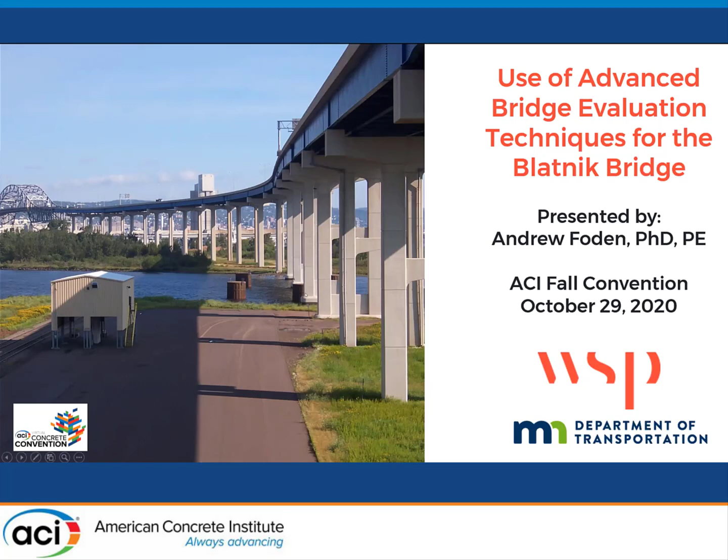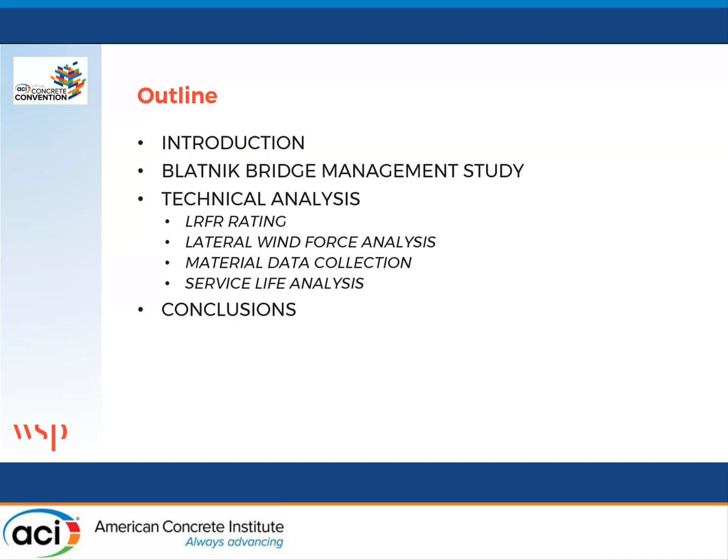The outline for my presentation: I'll talk a little about the bridge and its significance, then about a study started back in 2015 by MnDOT and WisDOT called the Blatnik Bridge Management Study, and a follow-up technical analysis that included LRFR rating, lateral wind force analysis, material data collection, and service life analysis, and then present my conclusions.

The Blatnik Bridge is located between Duluth, Minnesota and Superior, Wisconsin, and crosses over the St. Louis Bay.

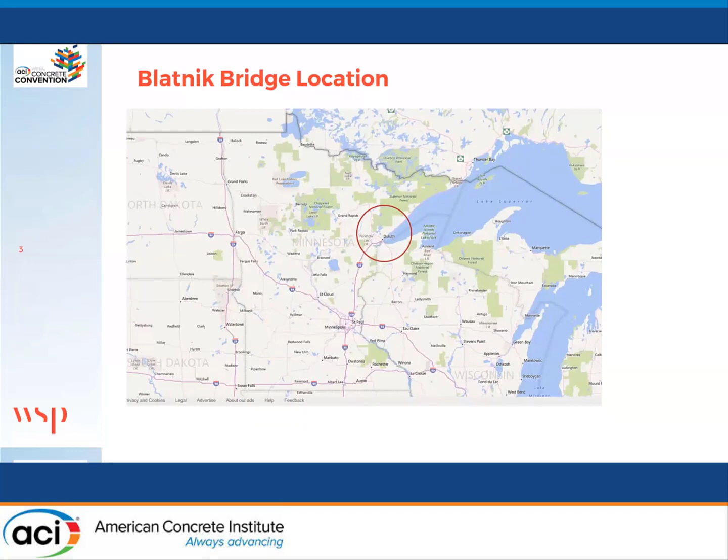It's a very important bridge for both MnDOT and WisDOT, and particularly for MnDOT, it's the second longest bridge in Minnesota, and it's right adjacent to the Duluth port, which is the largest on the Great Lakes, with over 900 vessels visiting and 35 million short tons of cargo passing underneath the bridge.

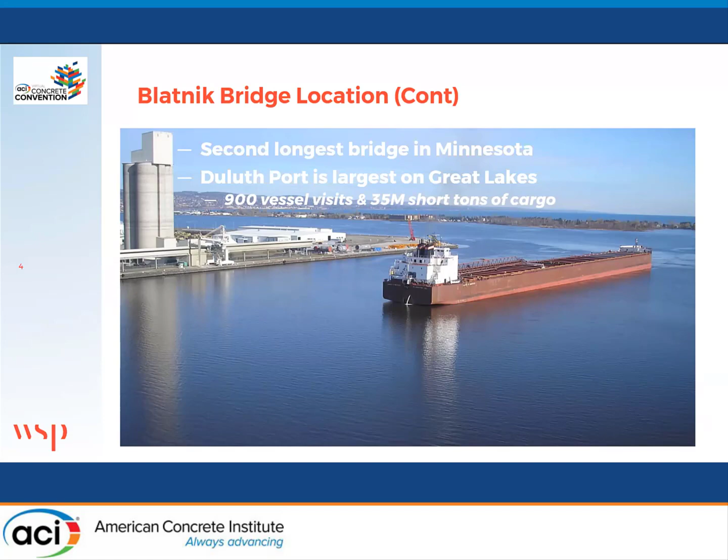It carries 4 lanes of traffic, 2 in each direction, with almost 34,000 vehicles a day back in 2013, a 120-foot navigational clearance, a total of 52 spans with a total length of almost 8,000 feet, 2 cantilever deck trusses with 270-foot spans, and 1 through-arch truss cable-supported deck with a main span length of 600 feet.

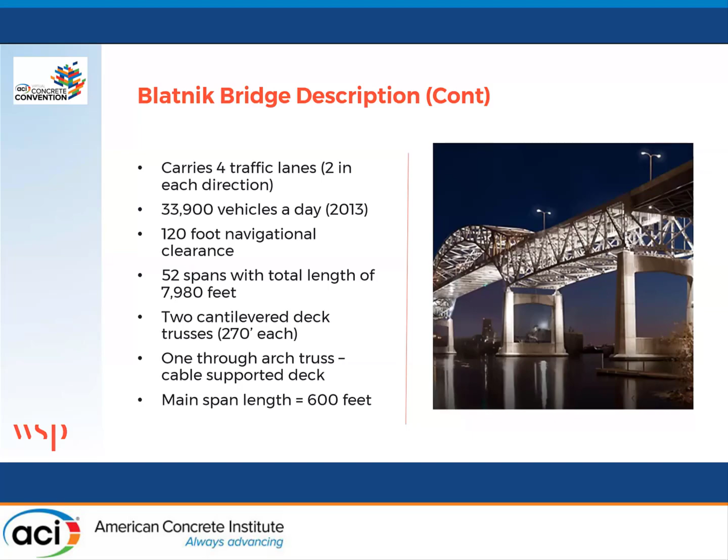In 2015, MnDOT contracted with WSP to undergo a management study for this bridge. The goal of the study was to help MnDOT and WisDOT make decisions about the future of the bridge, based on adding an additional 15 to 40 years of service.

Our goal was to identify investments that must maintain better than structurally deficient condition, and to continue to allow Minnesota C permit loads of 159 kips to pass over the bridge. While out on this bridge, I've seen a lot of wind farm components going across, and there are some pretty heavy loads.

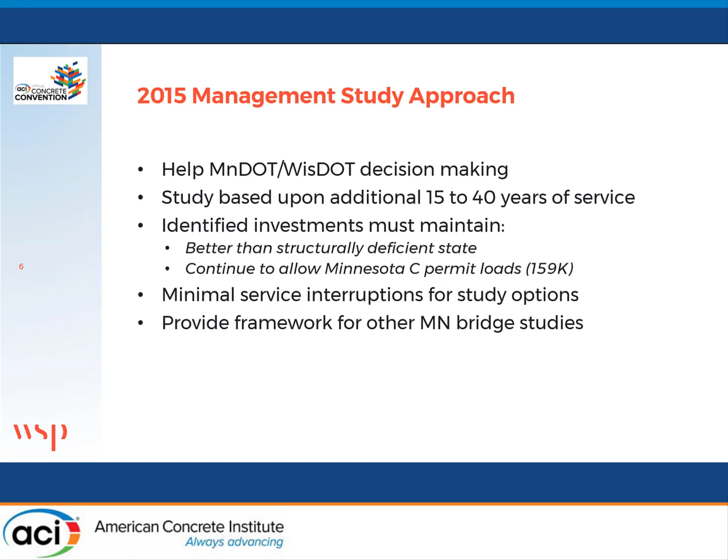We had to minimize any service interruptions for any of the study options and provide a framework for other MnDOT bridge studies.

We developed a series of strategies to maintain the crossing, and identified actions and investments to support those strategies, including quantifying the effects of traffic interruptions and identifying and quantifying risk factors. Each strategy was evaluated by life cycle cost analysis, with the goal of providing a tool for MnDOT's future decision-making and to investigate options for a potential truss-only replacement.

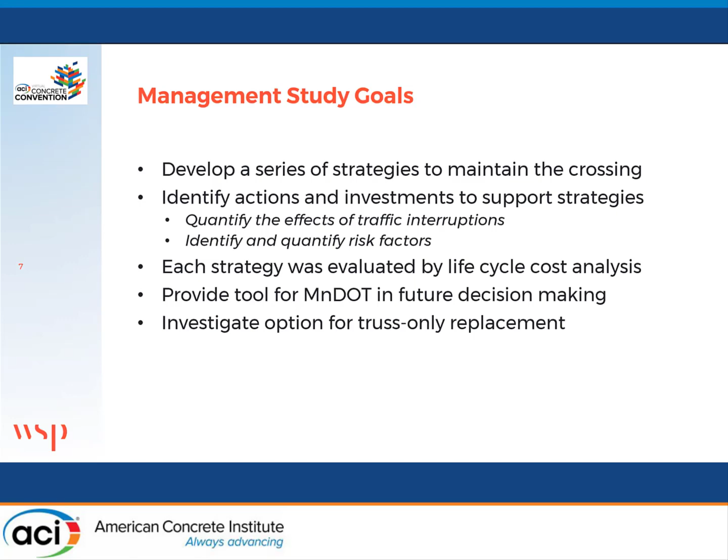The recommendations and associated costs were evaluated, including maintenance recommendations, rehabilitation recommendations, and replacement options. The scenarios developed were for 15 to 40 years of service life, with 12 different scenarios developed and fully evaluated.

Road user costs were generated for each scenario, and a life cycle cost analysis was performed with a net present value generated. The results of the study were presented in a final report and provided tools for MnDOT to use to guide future actions.

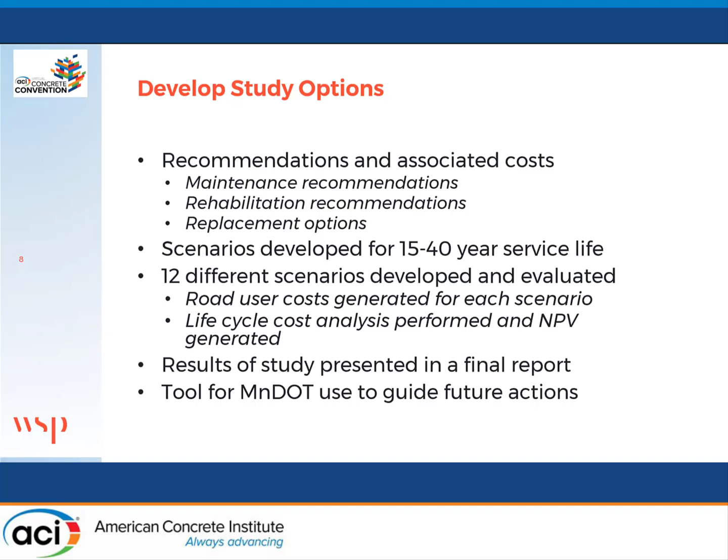As part of the study, we compiled and archived existing bridge data, and determined conditions using only the existing data. We had inspection reports, both routine, fracture critical, and underwater.

There are plans and specs from the original construction, a rehabilitation that had been done, and a widening that was done in the 80s, where they added shoulders on the approach spans but could not add shoulders in the truss spans due to geometric constraints, and we also did historical special investigations.

Part of that study also identified information gaps in the existing data. We only had basically visual inspection information, and there were a lot of unknowns that we really couldn't quantify well for making long-term projections.

So taking those gaps identified in that study, in 2018 that led to the technical analysis project, which I'm going to focus on today.

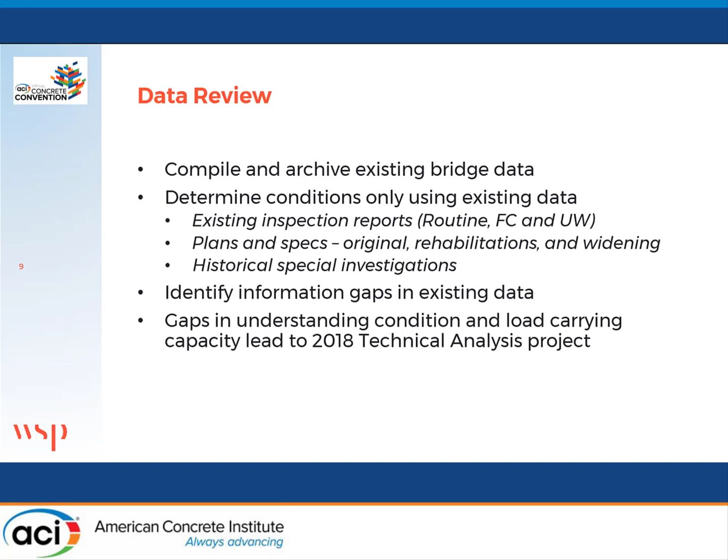The main goal of that project was to fill in the knowledge gaps using more quantifiable information to understand the load carrying capacity, the wind behavior, and the deterioration of components due to corrosion in the deck, superstructure, substructure, and footings.

I'm going to focus today on this concrete element since this is ACI, but we also did the evaluation of the steel.

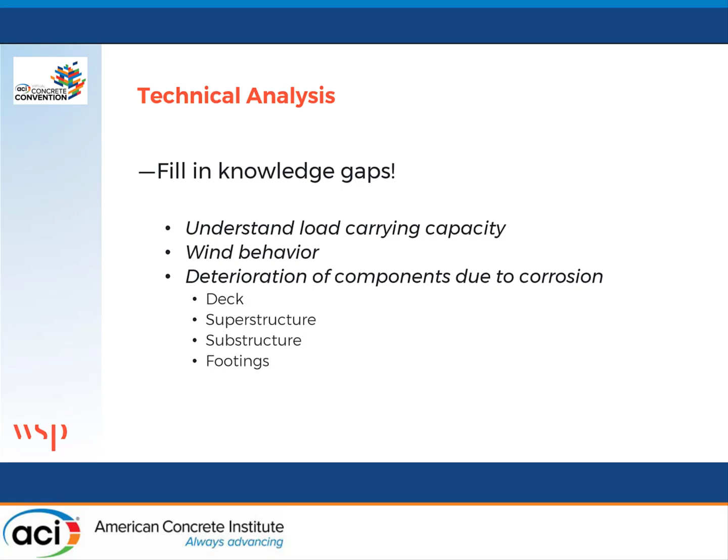To determine the load ratings, we did LRFR load rating. We used BrR only for the stringers due to the complexity of the structure, and for the trusses, we had both 2D and 3D models developed using MIDAs. We calibrated our models to account for the sequence of construction, and all components were rated, including substructure components, because of the potential reuse of substructure for future projects.

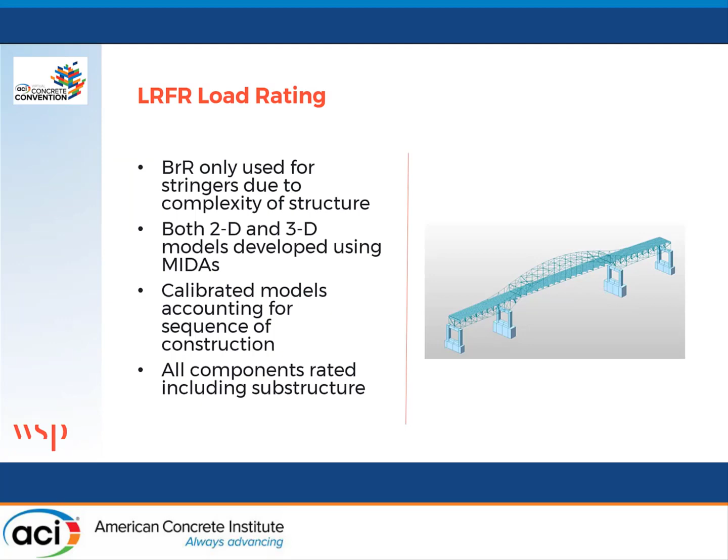To further validate the models, with the truss, there are always assumptions made. Is it a pin connection? Is it fixed? Is it somewhere in between? How do we model that? It does have an effect on the rating.

Also, with the complexity of the approach spans, with the widening, how does the widened structure distribute load with the original structure? So we evaluated this by doing load testing, done in conjunction with the University of Minnesota Duluth, and our moderator, Ben, was part of that along with his students.

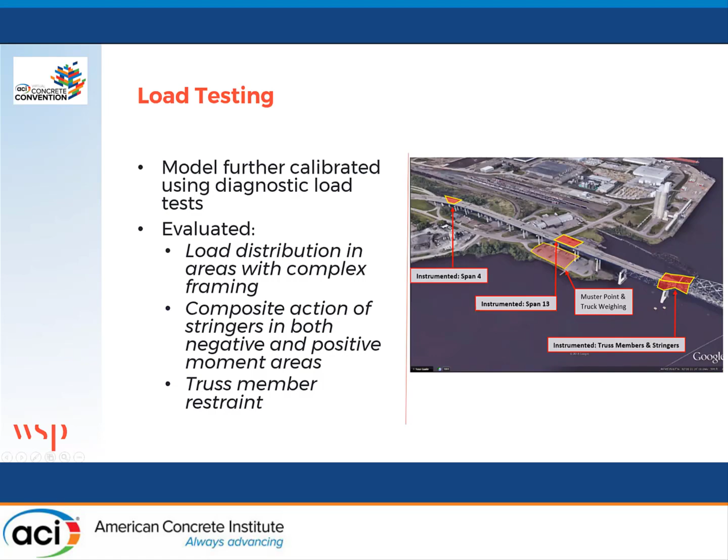The results of load testing showed that the FEM models overpredict the bottom flange stresses fairly significantly, and the models underpredicted local load distribution between stringers and girders. By calibrating the model to the load test, we were able to get higher load ratings.

Composite action in the built-up girders varied based on the distance to the applied load, and we really couldn't make very good conclusions about the truss restraint because the loads applied were relatively light. In a truss, most of the load is from dead load, and live load has fairly minimal effect.

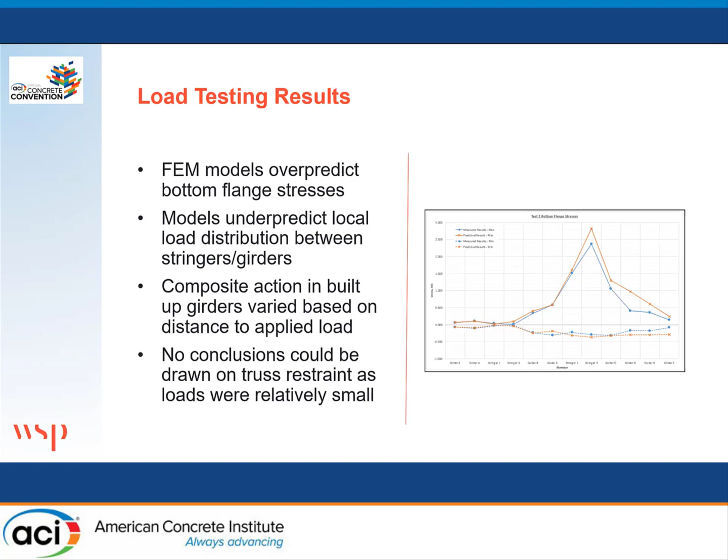So when we get into material data collection, we did a very thorough evaluation of the deck, which had to be done with minimal disruption to traffic. There were some ongoing lane closures with very limited windows during the biennial inspection that was being done, but primarily we had to work without any kind of permanent traffic closure.

So we worked with InfraSense and BDI to collect data with vehicle-mounted NDE methods. We had high-resolution video, infrared thermography, and deck acoustic response. Data was collected using mobile work zones at up to 45 miles per hour for the high-resolution video and infrared thermography, and the deck acoustic response, or SounDAR as BDI calls it, was limited to about 5 miles per hour, so it was a moving closure.

All of this was validated using limited destructive testing in allowed lane closures, and we also took cores to evaluate the chloride concentrations.

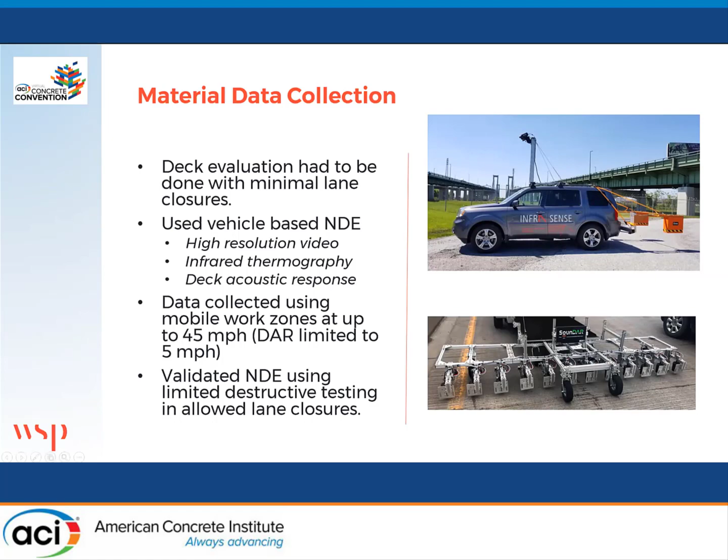I'm going to present some selected results. For the most part, we found this bridge deck was in excellent condition. There was quite a bit of transverse cracking, those shrinkage cracks from the original construction. The cracks had been filled by MnDOT very early on, and we found that sealing of the cracks has been performing very well, although there is some local efflorescence. For the most part, that deck treatment had performed as expected.

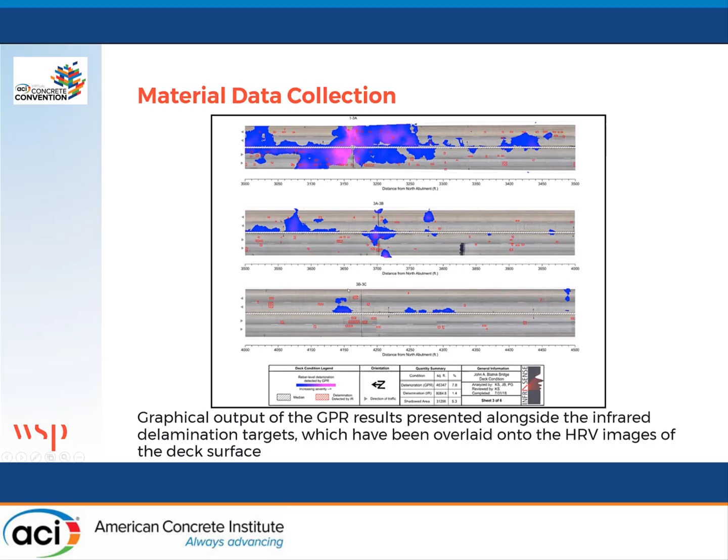You can see that the delamination areas are very limited and very small, and are likely, we believe, not due to corrosion, but more correlated with stress cracking.

The results from the deck acoustic response, overlaid also on the high resolution video images of the deck surface, show a similar amount of very localized potential delaminations that correlates very well. If you look at the red patches on the infrared slide, and then look at the colors on the deck acoustic response or impact echo plot, it's a very similar pattern. We found very good correlation between those two methods for this bridge.

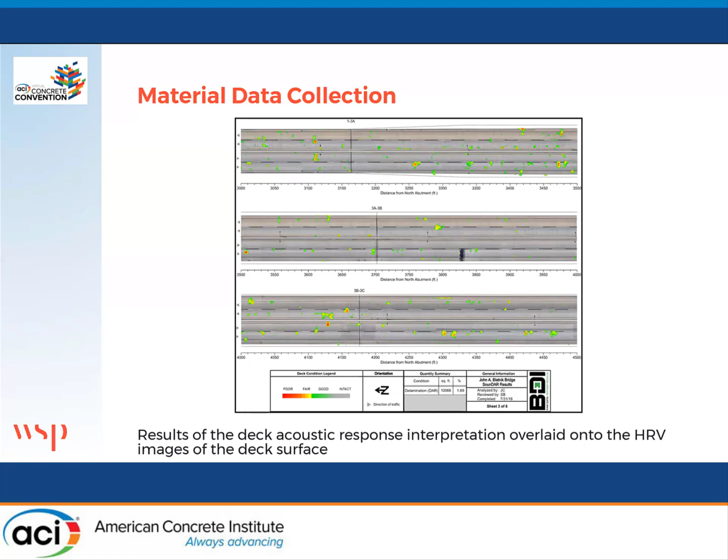When they widened the piers back in the 80s, they used post-tensioning to extend the pier caps. There was a variety of different ways that they did that, based on the pier and the widened section. Here's one typical one.

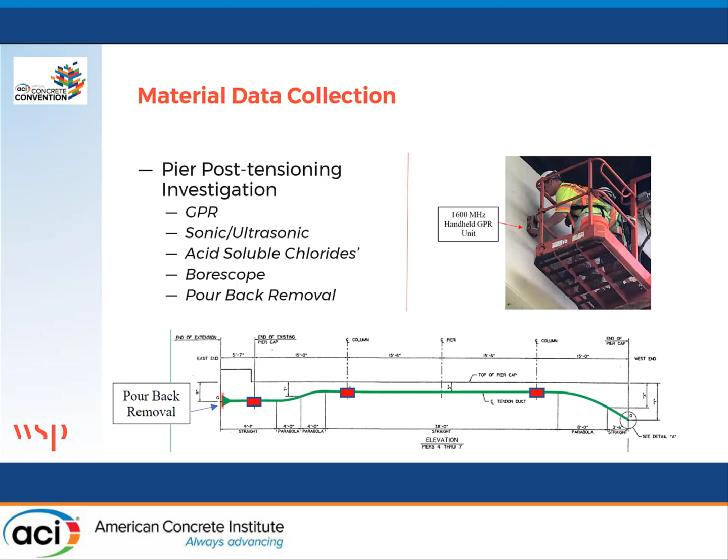Here's some of the results from the material data collection. In each of these 4 locations, when we went in and exposed the tendons, there's virtually no corrosion on the tendons. We've got sound grout, and when we did the chloride evaluation, there were very low to minimal chloride. So the protection of the strands is doing its job.

Another interesting thing we found with the aggregates in this area was pointed out to us - this work was done by NDT Corp, and they pointed out when we were on site one day that the pieces of concrete they were removing were actually magnetic. We did some investigation and found that the aggregates in that area had quite a bit of iron in them, so you could actually pick up the concrete that was being drilled out with a magnet, because there's enough steel in it for the concrete to be magnetic. That's quite interesting.

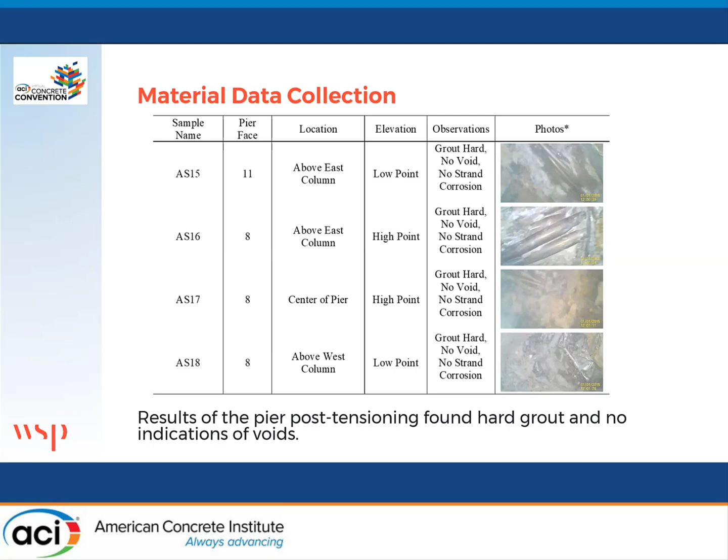When we exposed the anchor plates for the post-tensioning - obviously this was just a partially destructive test - we found that the reinforcement had no visible signs of corrosion at all, that they had been well protected and were in excellent condition.

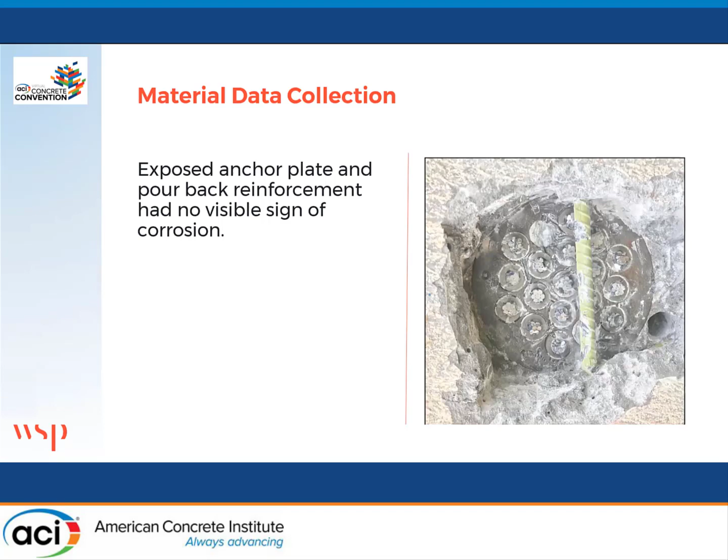Then finally, we did a service life calculation. We used all the information collected from the impact echo, from GPR, from infrared, the high resolution video, and our chloride samples. Part of that evaluation was to understand, using the GPR, the cover depth, because in order to do a proper service life evaluation, you need the cover depth and you need it fairly accurately.

What this figure is showing: we have the Minnesota approach, which is the red line, the main span truss, which is the blue line, and then the Wisconsin approach, which is the gray line. The dashed vertical blue line is the age of the bridge when the evaluation was done, which is just about - of the deck - about 25 years at that point.

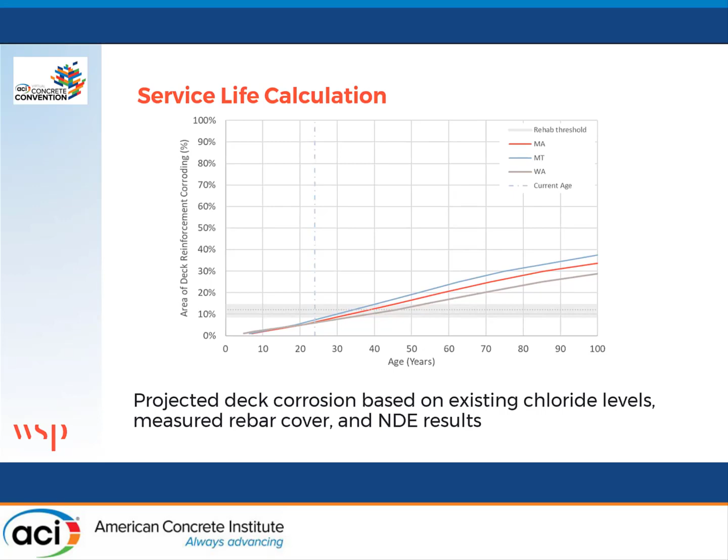The gray area is when bridge decks typically are in need of significant repair and or rehabilitation. It's generally accepted that somewhere between 9 and 13% is where an intervention would be needed. When we projected that out, we found that at about 40 years is where they would need that intervention, 40 to 45 years. So there would be significant maintenance needed in the near future.

So we fed all this information that was collected back into that previous framework developed in 2015, which we filled in the knowledge gaps with the more quantifiable information.

We found that the comprehensive evaluation of the deck showed that it was in very good condition. Both infrared and the acoustic response results indicate a very low level of existing degradation and delamination. The sealings of the cracks in the deck appear to be performing well.

However, from the life cycle projections, we did find that the deck will require a major rehabilitation in approximately 15 to 20 more years, which will impact the decisions being made about the future of the bridge. The detailed information collected was essential to feeding into the various service life models and calibrating the finite element models to achieve accurate and reliable results that can be used to make sound decisions about the bridge's future by both MnDOT and WisDOT.